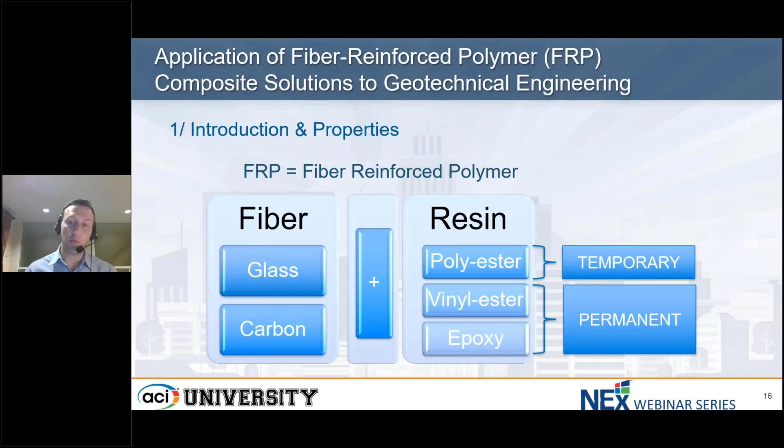So similar to what is done for rebar, polyester is exclusively used in temporary applications, and for most codes the temporary definition is less than 2 years, while vinyl ester and epoxy are resins that are suitable for permanent applications. And we will see how this can be used as well in geotechnical engineering.

A few properties about the material. One that has been largely used in geotechnical engineering is cuttability, the characteristic of the material being easy to break down and destroy. It might sound surprising when you think about construction, but this material has been used a lot for that, starting with soft eye applications in TBM tunneling.

So this is where we had the crossroad with concrete reinforcement, because it's used in diaphragm walls, and at the same time it's used for tunneling purposes. This is a typical property that has been used a lot, and you will see how we can use that in today's presentation.

As we know, those materials are extremely light, a quarter of the weight of steel for GFRP, and even a fifth for carbon fiber reinforced polymer. It's of course very much used when installation has to be done in complex areas, especially in slopes where cranes are difficult to access, or even underground where you are working at a face that can be several kilometers away from the entrance of the tunnel.

Again, the material is greater than steel in tensile properties. We'll see that. It's also corrosion resistant. We'll also tackle that aspect. And there are some other characteristics that could be interesting in niche applications, such as the fact that it's electrically non-conductive, thermally non-conductive, and also transparent to magnetic fields.

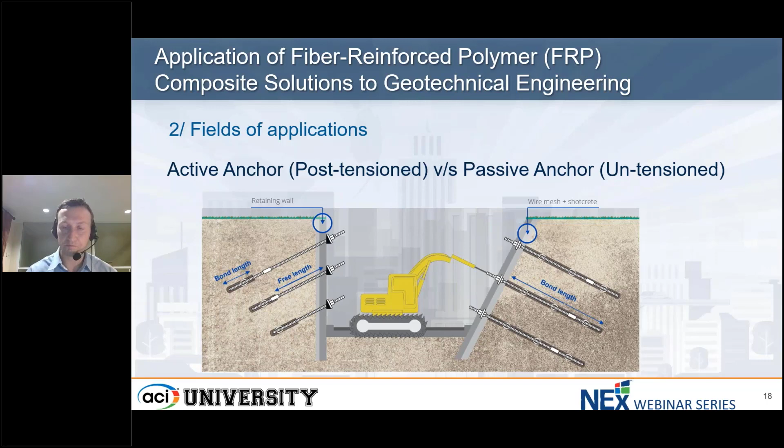So looking at the fields of application, what I propose today is to explore several properties of the product through the specific applications we are studying. After introducing the difference between passive and active anchors, another key aspect is the duration the product is used for. As mentioned in the first slide with the resin, we also differentiate in geotechnical applications between a temporary anchor and a permanent anchor. Whether you look at European codes or recommendations in North America like PTI, the threshold is 2 years. A temporary anchor will be less than 2 years, a permanent anchor more than 2 years.

And so we're going to explore several examples of products and the associated properties. One thing common to all these products, soil or rock anchors, rock bolts, active anchors, or tiebacks: all these are grouted anchors, and therefore the tensile properties remain the main dimensioning aspect, and bonding, not with concrete but in this case with grout, is key. So we're going to study that first.

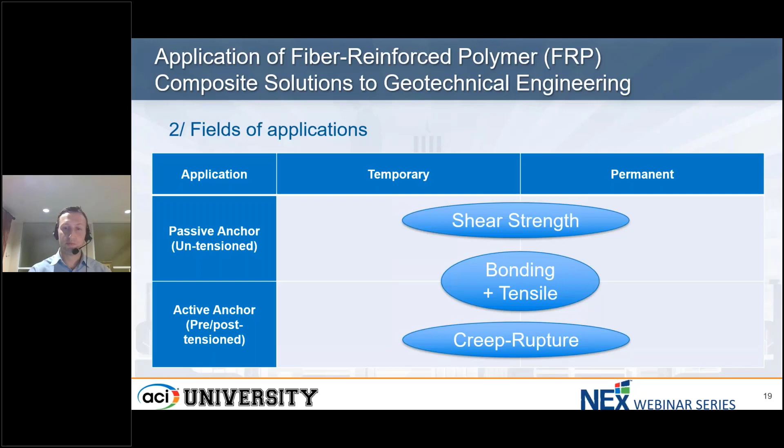After that, we're going to see parameters that are key in different applications. For passive anchors, we're going to study shear strength, which is generally a key concern of designers. We're also going to review creep rupture, which can be a concern for active anchors, and see how we address that when designing such structures. And for permanent anchors, we're going to review long-term durability and alkali resistance to ensure the product is suitable for long-term application.

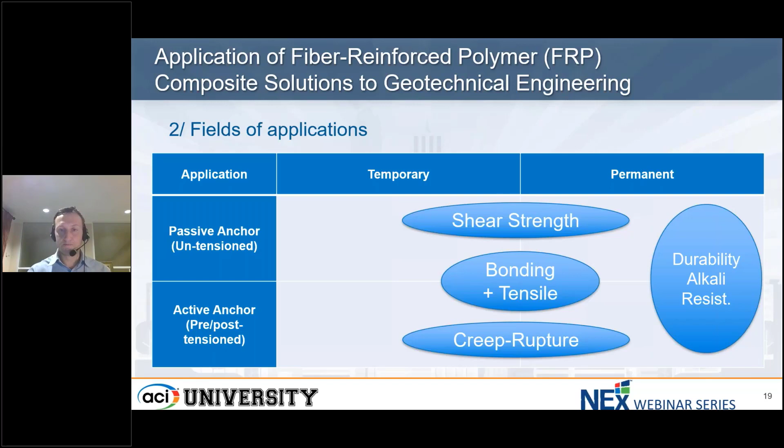Again, before diving into the actual examples, I wanted to highlight that in many cases, geotechnical guidelines are strictly addressing steel anchors, steel products. There are very few exceptions to that. So in the vast majority of projects we design with non-metallic anchors, we are using the design philosophy of those geotechnical guides, but we do have to refer very regularly to specification codes that have been purposely made for FRP.

And in that context, ACI, since the first version of ACI 440.1, and of course the associated ASTM standards are widely used. So we are very often using key design parameters or parts of ACI specifications and applying them into geotechnical guides when it comes to design. Similarly to rebar, where we want consistency between material specification and design code, we are really trying to keep this consistency between ASTM D7957, ACI 440.1, or more recently 440.11, to ensure our designs address the specificities of FRP material.

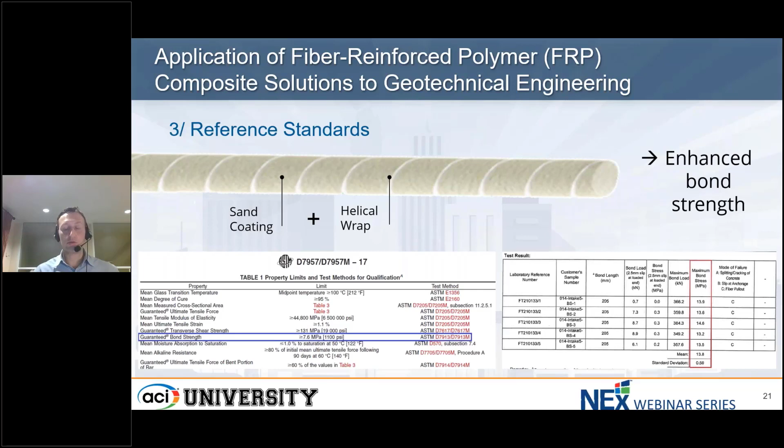So here you have an example of actual results obtained with this kind of bars. I repeat, such bond properties will be essential to a good product. Of course, when it comes to tensile, similarly to what is done in rebar, I would say the industry has quite well addressed and educated the market on the properties.

But maybe for some of you who might not be so familiar, the specificity of FRP bars is we always need to test them in full section of bars. We cannot characterize a coupon sample of the material because the properties are not linear with the section. There's a phenomenon called shear lag, which means the properties will not remain the same as the diameter increases.

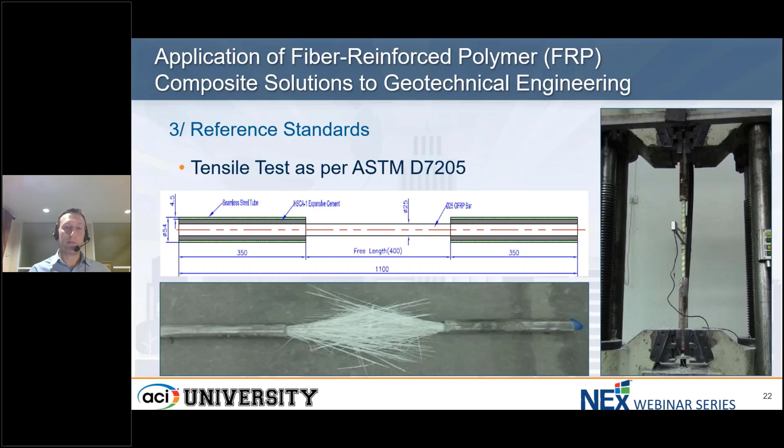So no yield point, no ductility, and therefore, while the modulus of elasticity is 4 times lower than steel, the elongation at ultimate is much lower. So this is something we always have to remind, because the failure mode and the mechanism engaged in geotechnical applications are different, and that's why we have to address them through specific design aspects. The same way ACI 440 uses equations different from ACI 318 for the very same reasons. So this is a reminder, but extremely important. Those are all the prerequisites before we engage in any geotechnical engineering aspect.

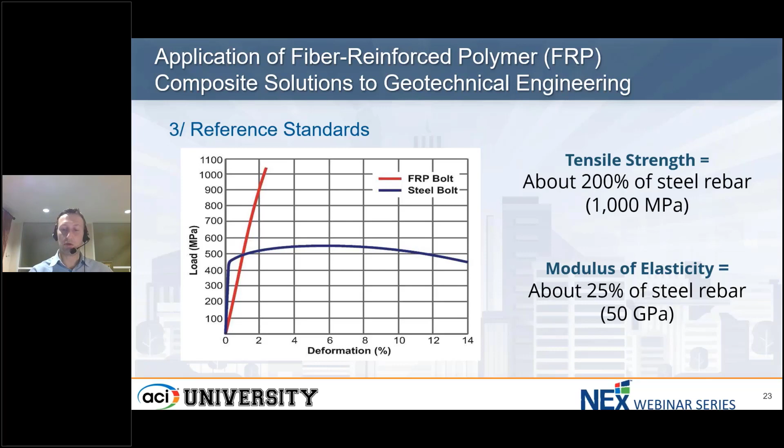So we'll start now with a first area of study. We'll start with those passive anchors, and especially I would like to address the case of soil nails that are mostly used in slope stabilization. And for a long time, we've seen people concerned about designing those products with GFRP material on the basis that the shear of the bar was low. And that's partly due to education that we've been doing explaining that the material is easy to cut. So this is something really not easy to explain, because people feel we are turning around the properties of GFRP the way we want.

In reality, when you install the system in the ground, so that can be in rock, that can be in soil, before the system fails in shear, there will be crushing of the surrounding material. That could be grout, that could be the ground itself, so soil and rock. All this material will be compressed, and once its compressive strength is exceeded, will be crushed up to a stage where the actual bar will fail in shear.

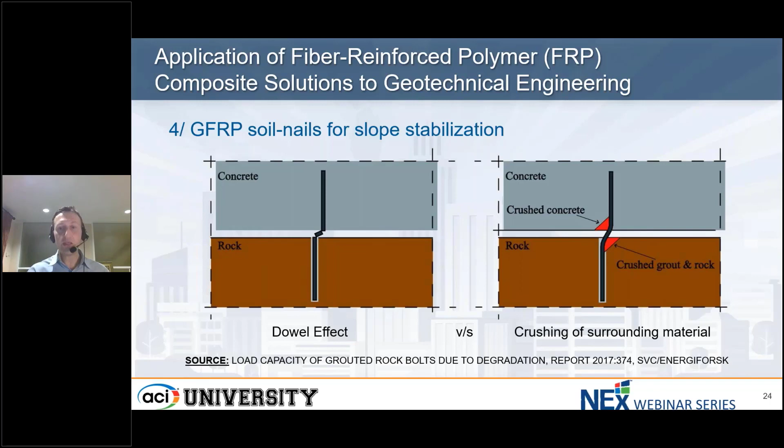So here, what you see on the screen now is a comparative test. On the left, you have a GFRP bar, which is a fully threaded bar actually, used often as a rock bolt. Of course, on the right side, you'll be familiar with a steel rebar, but I think I can assume many of you have not necessarily seen the test you see on the right.

Actually, we've used the ASTM standard that is normally for GFRP bar, and we apply that to a steel bar. Why is that? Actually, most of the time, we don't need to test shear of steel bar. We just know that. We use von Mises ratio, and then we derive it from its tensile properties. However, we felt it was necessary to compare apple to apple, to perform the same test on the same product.

So you will see that when you test FRP bar compared to steel in this condition, we get fundamentally different results because there's no surrounding material. Again, this is the pure dowel effect.

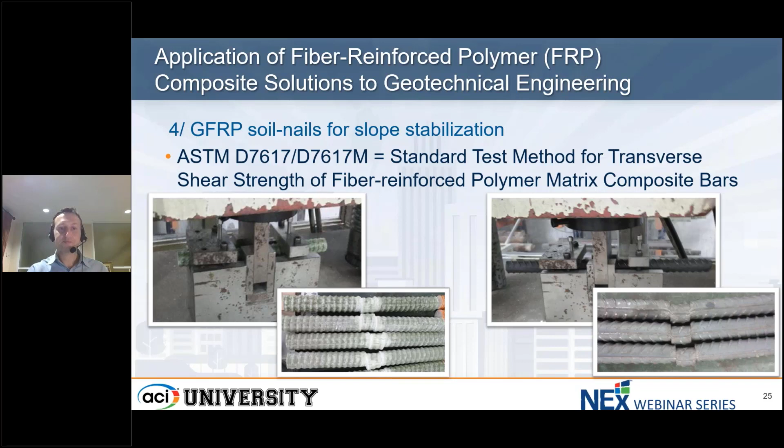However, there's a very interesting BS standard, 7861, as you can see here on screen, that is originally meant for coal mines. So this is a pure geotechnical engineering design guide. And what's very interesting, they do address the specificities of both steel and FRP. So that's one of the few exceptions I was mentioning earlier, because geotechnical engineering generally only considers steel.

This is the test of a simulated borehole. So the sample is tested with its surrounding material. So it can be cement grout, it can be resin grout, but we don't test the bar alone. We do test with surrounding material. And we've run the same test, again, with a GFRP bar and of course with the steel bar as well as a reference point.

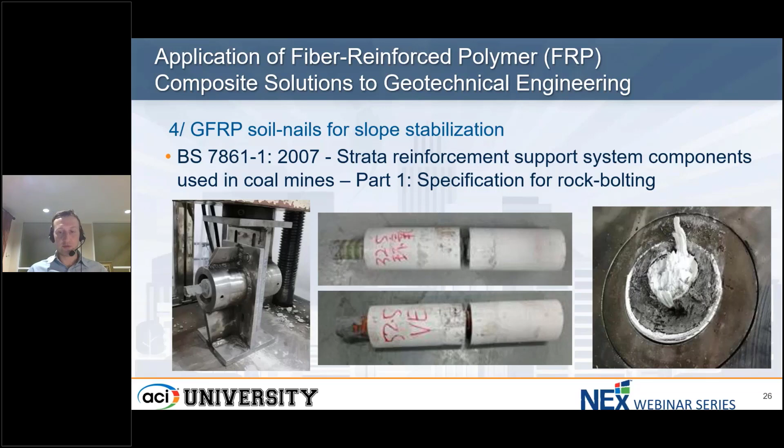So let me present it in this way. What's very interesting with the results is on the second column in the middle, bar alone, you can see that a GFRP bar would only develop about a third of the steel bar when tested for pure shear, so the dowel effect, which is consistent with the perception that GFRP is weak in shear, and also it's easy to be consumed by excavation equipment, tunnel boring machine.

However, when you test it as a system with the surrounding material, the performance of steel increases marginally. You see from 416 MPa to 488 MPa, but the performance of the GFRP bar more than doubles. And for this reason, the GFRP bar would develop 75% of what you get from a steel bar. So what this table is telling us is a non-metallic system behaving in shear can develop actually way more than we suspected, actually a lot, 75% of what the steel system performs.

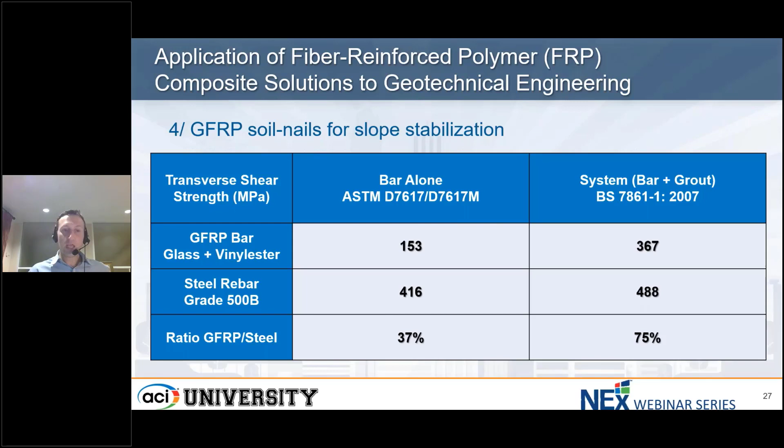And even more interestingly, the value of 350 MPa is actually what you get from von Mises ratio. So actually, in this case, the GFRP bar develops more than what you would assume for a steel system. So it would actually offer you all the safety you would expect in your design. To explain a bit about that, I invite you to study a very interesting paper from Dr. Thomas, who published it at the World Tunneling Conference.

I won't have the time to explain all in detail here, but the idea is the reason GFRP can have such behavior is because of the tensile properties. So when you get this deformation, some of the stress will be taken in the tensile properties, and some will be in the frictional. And so GFRP being so strong in tensile, you really get this contribution when you have the system working in shear, and that gives you, with the model developed by Dr. Thomas, 350 MPa at 90 degrees, which is what we observed.

What's interesting is if you were to do that at a different angle, like often we see in geotechnical work, actually GFRP would exceed the performance of steel, and that allows us even to get better behavior.

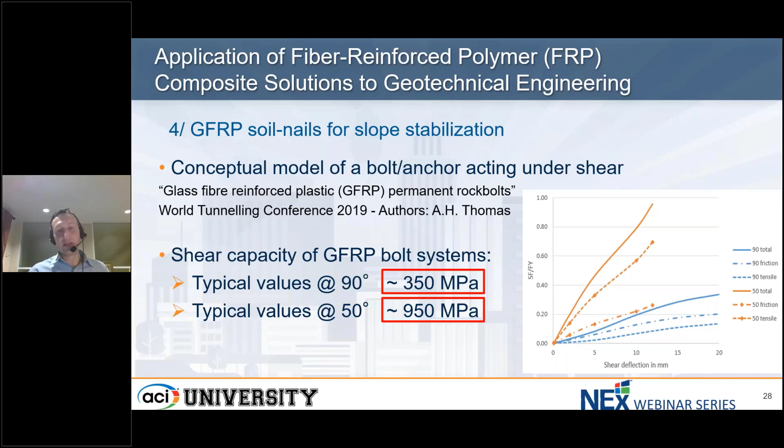So with all these results in hand, we were able to offer very interesting ground engineering applications, starting with soil. So what you see now on screen is an example of non-metallic or partially non-metallic soil nail. So it's a hybrid system. The reason this is a hybrid system is we did retain a splicing system made of steel and even the head made of steel due to mechanical continuity.

So the concern with the soil nail is generally we are way over 12 meters or 40 feet, which are generally typical lengths for shipping, especially for containerized goods. And in order to have mechanical continuity, you need to splice that. Unlike in a concrete structure, we cannot use lap splice because we cannot rely on the integrity of the concrete. Here we have grout that will very often be damaged, cracked through the normal movement of the soil or the ground.

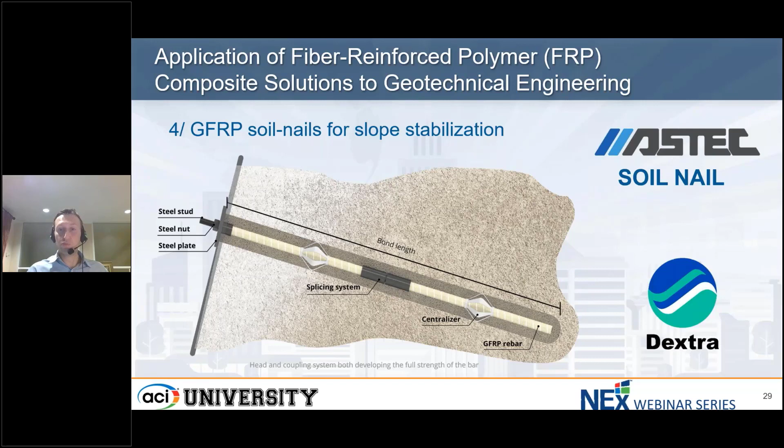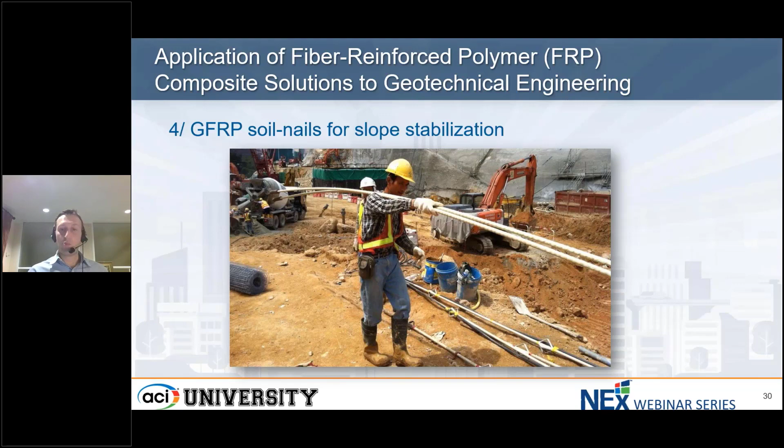As we know, those systems are extremely light. I mentioned that in the introduction, a quarter of the weight of steel means you can easily carry those nails by one man. You see he can even carry two nails like here in this example. And to work on complex terrain like slopes, it makes it much easier.

So as I highlighted, the mechanical continuity is key. And again, here I wanted to highlight with a practical example of pull-out tests, which are very common on a job. So you would normally test 5 sets, for example, at the beginning of the job, and then there will be an agreement with the consultant and the owner on the frequency of tests. So typical frequency would be 2% of the nails installed will be tested for pull-out. And that's why you need a head that allows you to perform that in situ test.

So we are using such a system, steel connectors, to extend the bar, to also test in the head location, and that really gives you the best of the two worlds, with FRP material that is again resistant to corrosion, that is easy to consume, easy to cut, with the steel system that can develop high strengths in a nut, in a stud, in a fine pitch thread.

Maybe the challenge, however, when you have steel components is cuttability. So those components are small enough to be still consumed by the excavation equipment. So most of the time, statistically, you're going to hit the GFRP bar. But if you were to hit the steel components, it would be very easy to evacuate it like you have a boulder, an inclusion in the ground.

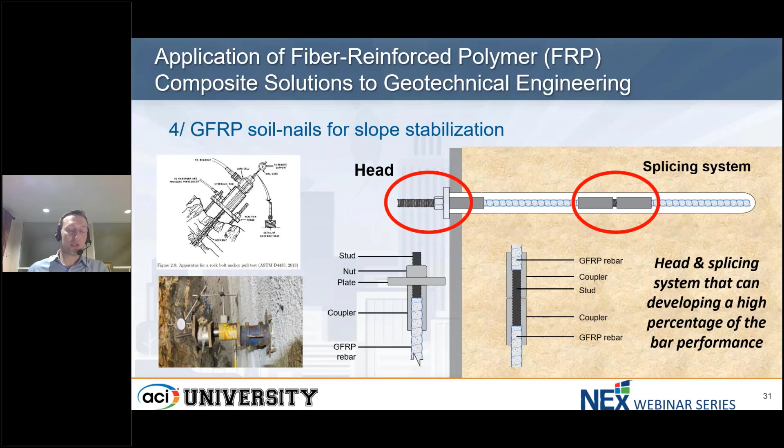And for corrosion, how do we address that? We address that the same way we would address corrosion protection of couplers when you have a steel anchor, like a DCP anchor, for example, a corrosion protected anchor. We're using heat shrink sleeves that are also used, for example, on steel couplers, steel splicing systems for steel rebar, epoxy coated, for example. So the heat shrink sleeve is the best way to protect from corrosion those localized steel components you get in the system.

So through all this, we have enough technical background on the tensile, bond, and even shear properties. Also enough answers from the system through the steel splicing system and corrosion protection to design a GFRP soil nail.

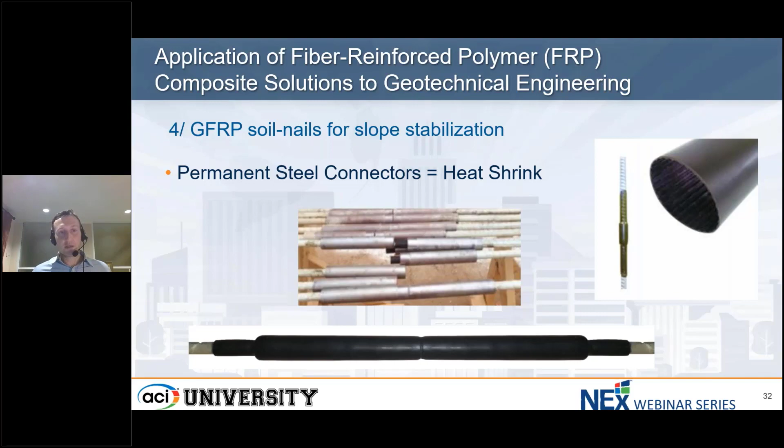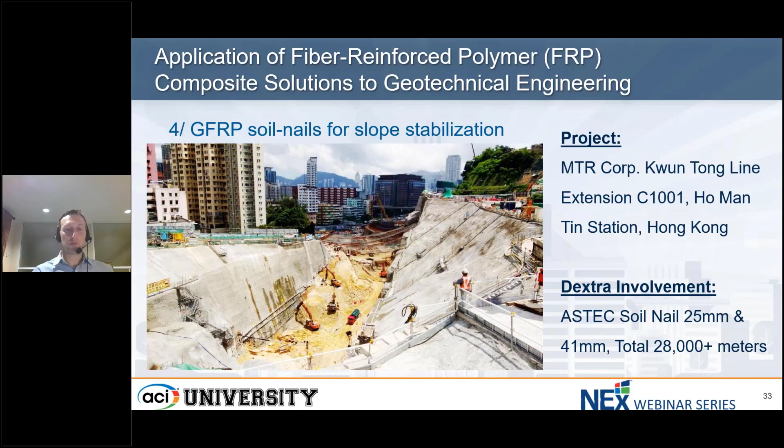So this is a typical example of a soil nail project, but maybe for the records, as I mentioned, this is over 10 years now. And actually every year Dextra is probably supplying 3 or 4 jobs specifically with this kind of application. So non-metallic soil nails, temporary, and more recently, we are now doing pilot jobs with the Hong Kong Polytechnic University, the local government, to characterize using those soil nails in permanent applications on slope stabilization, which is a very big concern in Hong Kong with a heavy rain season. And so it's very important to stabilize those slopes in Hong Kong. So they are now exploring, through 2 pilot projects, using soil nails permanently.

Allow me now to move up with new technical concepts so we can address, let's say, somewhat more challenging applications. After doing those passive soil nails, let's move up to doing tiebacks, so active anchors. And to move from a soil nail to a tieback, as I explained, we are dealing with a post-tensioned system, and it's extremely important to characterize the creep and especially the creep rupture of the material. So again, not reinventing the wheel. Answers, as often, are available to us in ACI and ASTM.

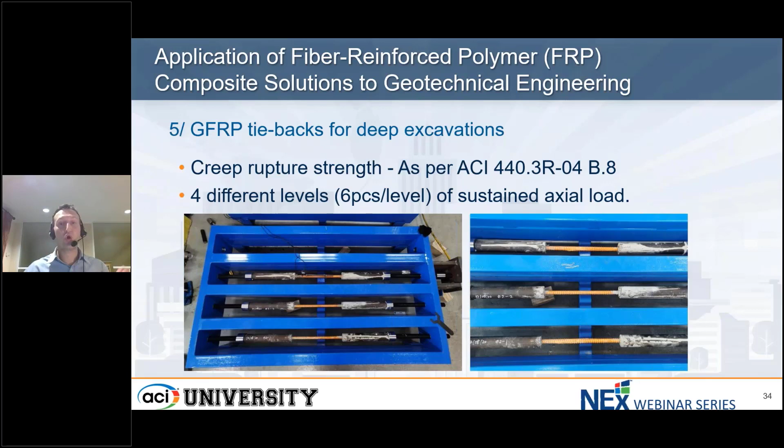So we are following the creep rupture test from ACI 440.3 to obtain the million hour retention. For those of you not familiar, we apply many different levels of stress, purposely very high, to induce rupture and to measure the time, to know when the rupture will occur. What is interesting is those ruptures occur in a logarithmic fashion. So in this graph you see at the bottom, the scale is the time, but in a logarithmic scale. Typically number 3 means 1,000 hours, number 4 means 10,000 hours, and so on, up to 10 to the power of 6, which is a million hours.

And why do designers love million hour retention? That gives you 114 years of design. So as we can see, the numbers are highly correlated. We see the R2 factor is almost 0.98. So it shows that there is correlation between the stress level and the time, and therefore we could conclude on the million hour retention of that particular GFRP material. This gives us a key factor to design

those anchors, but again, in the same spirit of ACI, I'm thinking, for example, of ACI 440.4 that is used for pre-stressed concrete members, we are not using GFRP for permanent applications, so we will only address temporary applications. Otherwise, creep could become prohibitive for GFRP, for glass fiber reinforced polymer anchors.

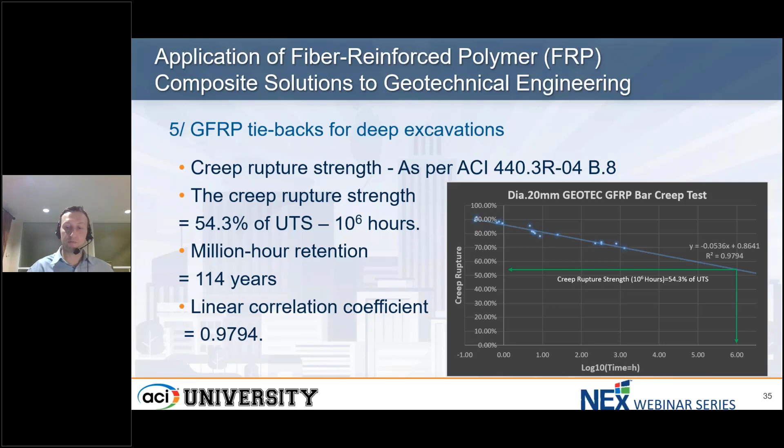So now, how to achieve that? Now that we've seen the theory with the creep rupture, how to design and obtain tiebacks, so post-tension anchors? Dextra's answer to that is a product that behaves in a very similar fashion to those steel strand or multi-strand anchors. So the idea was to develop again a hybrid system using a GFRP bar on one side and a steel strand on the other side, with the same splicing system introduced earlier, so a steel connector. And the idea is to have the same capacity per strand.

So when you have a 0.6 inch steel strand, or T15 in metric, we get the same capacity, which is 250 kilonewton. And even in terms of design, we get very similar design values for temporary application, which is 150 kilonewton per strand. So the beauty of this product is the ability to design the product the same way. So we end up having the same number of tendons, and it can be installed and tensioned the same way because the product is using a steel strand for tensioning purposes at the head location.

So multi-strand anchors are very easy because you can design for a large range of capacity, loads, just by adding more tendons. This system can be spliced, so you can address many different lengths. And as often, the free length is obtained by placing a bond breaker. So we debond the free length, and therefore we can have a fully grouted system just by protecting the GFRP bar from the outside. The bar is free to move inside the free length through this bond breaker, and therefore it's very easy to create those multi-strand active anchors.

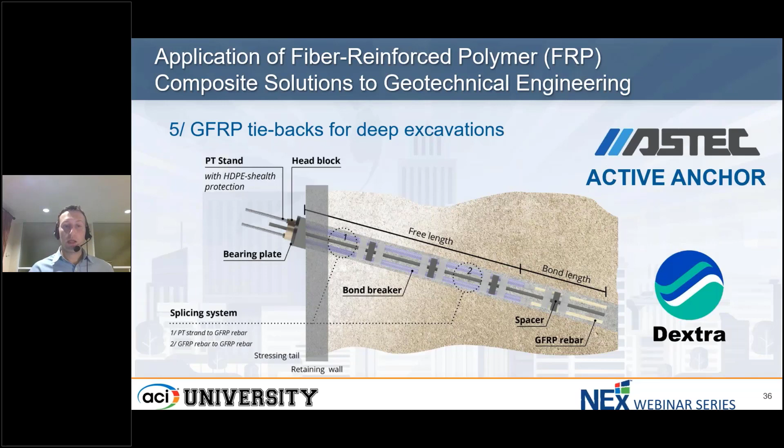So as I highlighted, now you can see the product, let's say, without the bond breaker, which is a little bit easier to understand. But the beauty again of the system, again hybrid, everything you see in GFRP will be installed in the ground, and the steel strand, the upper side on the left side of the screen, will be the part you have inside the retaining structure, protruding outside to install the hydraulic jack and be able to perform testing.

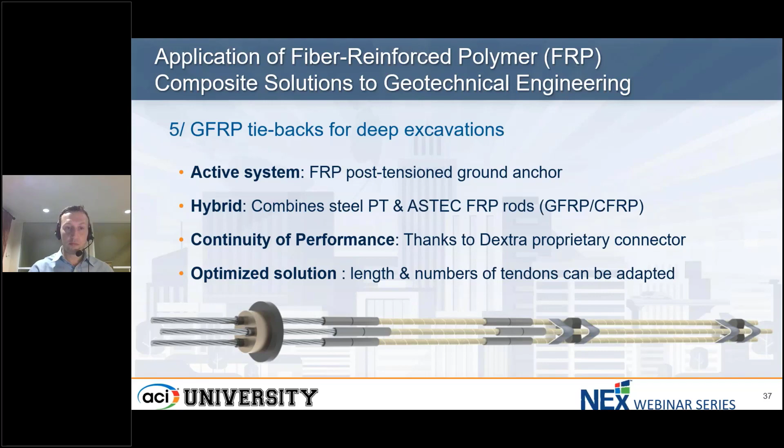So the idea of a product like this is to be used, I would say, either inside excavations of typical underground car parks as an alternative to strutting, internal bracing. So the idea is, yes, I want to be able to install an anchor, and at the same time, I don't want to create issues for the neighboring plots, because you will encroach into adjacent plots. So instead of installing steel and trying to remove it, we're installing GFRP and know that this GFRP is not creating obstruction.

Another application, which is a bit niche, but it's also interesting, is the ability to place this anchor in a location where we know it's going to be destroyed, and typically that's the application of soft eyes. So I'm going to show you a very short video just to illustrate how anchors have been used in the soft eye location. So it means in the alignment of the TBM, and this helps somehow as a mock-up to prove how cuttable the anchor could be. And further to that, it was able to be used in other locations, so pretty much the whole perimeter of the station. So I'll present the video, and I'll tell you a little bit more right after.

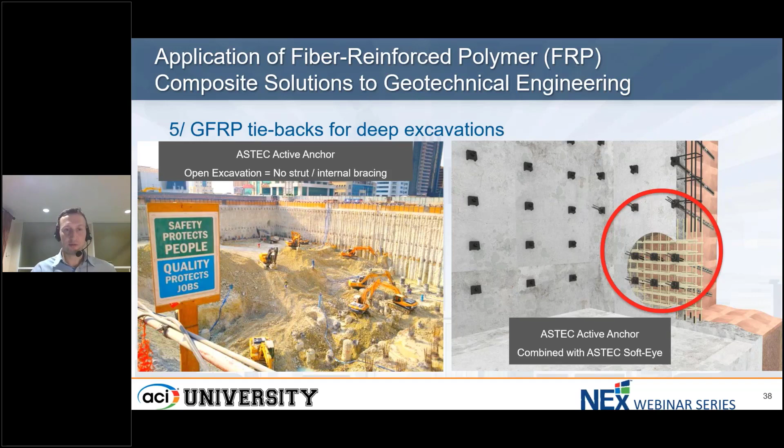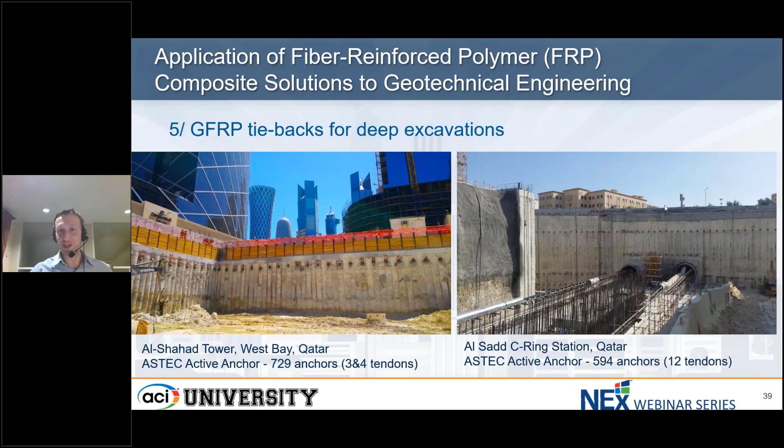So the project I'm going to show you is a project in Doha, in Qatar, and those anchors have been used in many metro stations. So here you have just examples of excavations that were done there, and you see the numbers. So on one job site you could see several hundred anchors. Most of them were relatively low capacity, 3 or 4 tendons, but we've done anchors with 12 tendons. There were 7 layers of anchors in that station, which was a crossing of two metro lines, so 35 meters deep, about 100 feet. And so that makes it extremely challenging. So quite an interesting project. So let me show you now the video, and then I'll illustrate it a little bit after.

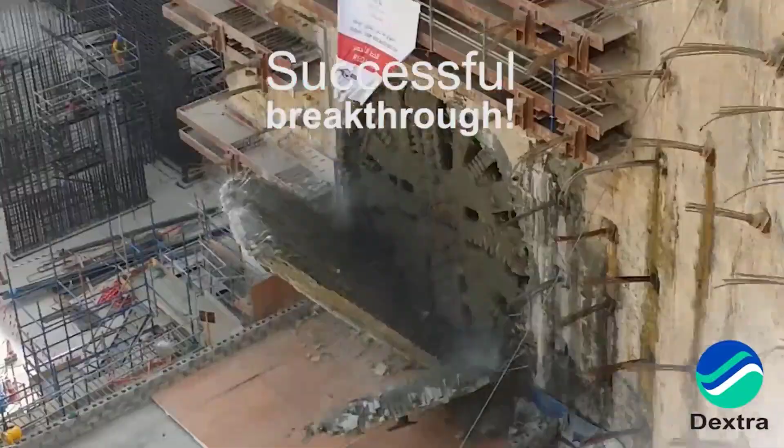So as I highlighted, this video shows to an untrained eye, let's say, a typical soft eye breakthrough. So the tunnel boring machine has been able to bore through the diaphragm wall. But what was really interesting is those anchors installed inside the soft eye area were non-metallic. Actually, maybe you saw this, it was mentioned, it was even glass fiber, it was GFRP used in that project.

And so that really proved that it's possible to design anchors going beyond the original footprint of the excavation, and yet making them of a material that would be easily consumed. So here by TBM, but you can imagine the same thing from the surface, could be a piling rig, or also from an excavator in case of open cut excavation, for example.

So after reviewing those active anchors and post-tensioning, this presentation wouldn't be complete without addressing permanent applications. So we've seen those passive soil nails, we've seen those active tiebacks, yet we are doing more and more geotechnical applications with permanent solutions. So remember, over 2 years, but actually I'm really referring here not just to 3, 5, 10 years or semi-temporary or semi-permanent, as some might say. No, we are designing projects with 50, 100 or 120 years application.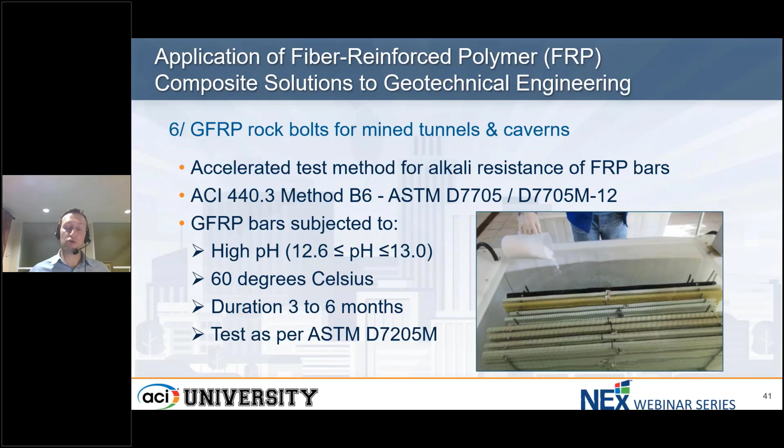So we've done a lot of characterization of the material. Again, for those of you not familiar, this accelerated aging test is pretty straightforward. The idea is to conduct tensile tests as per D7205, as I showed earlier, but after conditioning the bar. So you get some test bars at T0, at 0 hours, but then you also want to have bars in an environment that is high temperature, so 60 degrees, very high pH, and that will give you a simulation of the long-term behavior of the material.

So here, for example, there are so many different tests performed with large variation in the duration. Also, whether you use moist concrete or you use an alkali water solution. Also, if you apply stress at the same time or not. But in general, again, best is to refer to ACI for the guidance. The requirement in ASTM D7957 is to be over 80% after 90 days. And so this is again showing that the behavior of the material is highly predictable.

And so we can just apply a factor. So again, in ACI 440.11, the factor today is 0.85. So we discount the tensile performance by 15%, and then we get the performance of the material over time. And that's really useful, using this for designing GFRP bolts, for example, because the alternative to that would be a steel bolt on which you have to put many corrosion mitigations, so typically galvanization and/or epoxy coating and/or a corrugated pipe, all this to delay the corrosion, but always with a risk this corrosion happens.

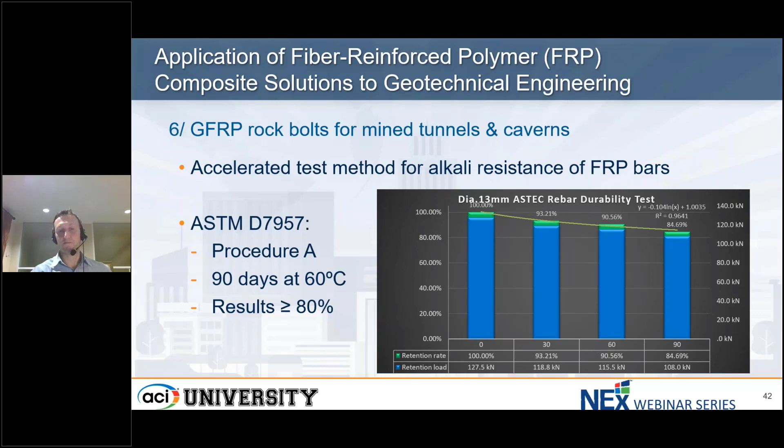So how to do those applications? We have available to the people designing tunnels and caverns a large variety of rock bolts. Typically, there are even some self-drilling rock bolts available, but I'm going to address here maybe some of the most common types, which are solid and hollow rock bolts. It is good to have both options available for different types of installations. So typically, hollow bolts are used more to inject the grout once the bolt is installed. Solid bolts are generally installed either in a pre-grouted hole or with resin cartridges, typically in mines.

And as you can see, we are using a fully threaded bar, which makes it very easy to add accessories. So here you see we have a non-metallic system. Most of the rock bolts, or almost the entirety of rock bolts, are less than 12 meters, so we don't really have the concern of splicing.

However, we still developed special accessories to be able to perform the pull-out test by mobilizing around 150 to 180 millimeters in the head location and be able to develop a large performance in the head location, again, for pull-out testing, as I highlighted earlier. So again, unlike a soil nail, here we are able to use a shorter system, and therefore we can rely on being 100% non-metallic. And there are many different accessories available in the head location.

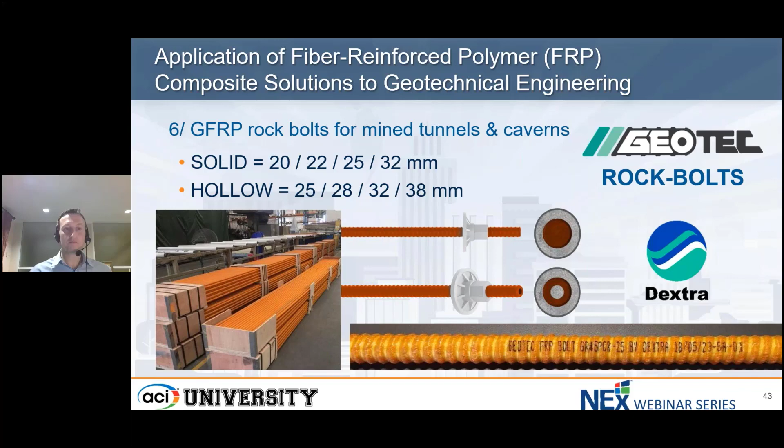One of the key advantages, again, working underground, especially when you work on a platform, when you work on a bench, is the material being light. It was proven, and this is a very interesting study from Scandinavia, that installing those FRP non-metallic rock bolts is so much easier. Maybe to give you one rule of thumb, GFRP being stronger and at the same time lighter, we can normally cut the weight of the bolt by a factor of 5 to 6.

A typical diameter 32 rock bolt could be 40, 50 kg when it comes to long lengths, 6, 8 meters; you get it below 10 kg most of the time when it's GFRP, through reduction of the diameter and through lower density. So definitely a very big advantage here when it comes to installation. It reduces the risk of incidents or accidents, and of course increases productivity.

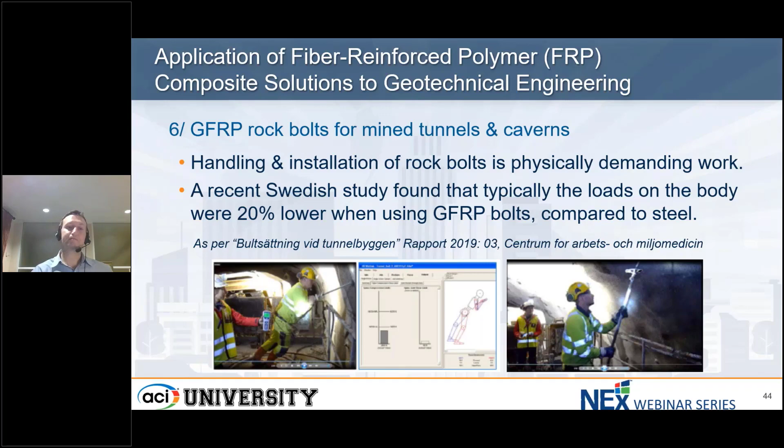So let me illustrate this with a very interesting project. I'm going to use for this presentation a project that is completed and already operating in Vietnam, storing LPG for an industrial application. The storage of propane and butane is actually under the factory that is producing synthetic textile, PP fiber, polypropylene fiber.

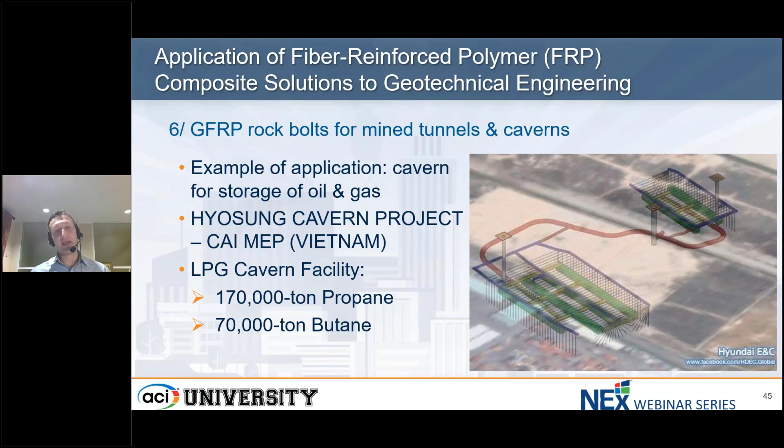And the concept is to create a large cavern to store that. This cavern is saturated with water to ensure the gas is trapped and doesn't leak through all the veins, all the joints. And so that makes it very interesting. So let me illustrate. This is an example of an access tunnel, and all the white spots you see here on the lining are actually GFRP rock bolts.

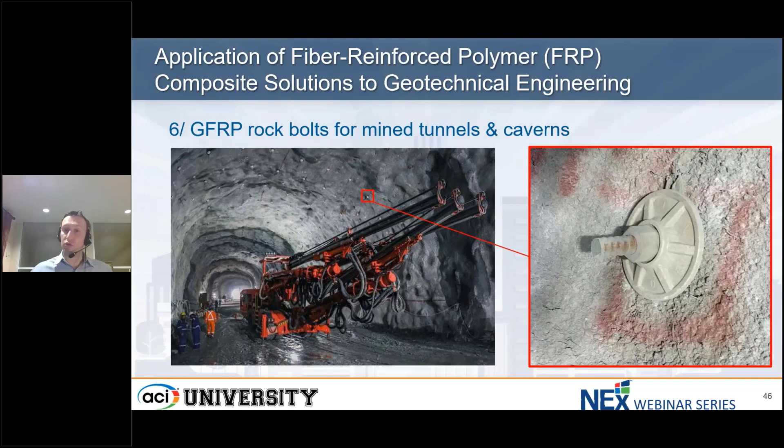You can see that it's an unlined tunnel. The same way, the cavern is also an unlined cavern. And those bolts are permanent. The lining you see here is a very thin layer of shotcrete that is only there to keep in place very small pieces of rock that could fall. But all the pinning of the wedges in this underground structure is done by using GFRP rock bolts that are designed to last 50 or 100 years, depending on the application.

So you can see how light and also flexible the rock bolt can be, which makes it very easy to install. This is the typical geometry of the actual cavern, so you see quite large, 22 meters high, 17 meters wide. They have two benches to produce that structure. On a job like this one, over 30,000 rock bolts have been used.

But to give you some idea, we've also supplied some much larger caverns that used in excess of 600,000 rock bolts. Every single rock bolt is GFRP because it has to be resistant to corrosion and designed to last. And currently we are even executing a tunnel project, and rock bolts are also used in similar fashion as permanent rock bolts in this single shell lining tunnel.

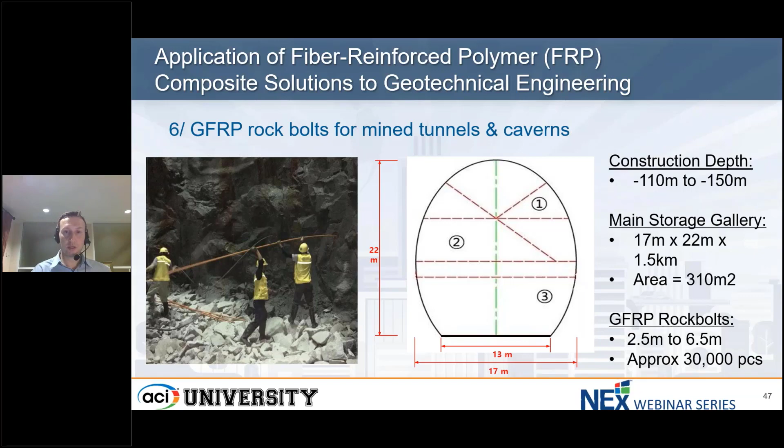So to conclude on this presentation, the objective today was to share with you some key parameters. I hope this is clear for you. So we've been through the tensile and the bonding. We've been through shear performance. We've been through creep resistance. And of course, we've also been through alkali performance to address permanent applications.

Just as a summary, I won't go through the whole slide, but I wanted to illustrate here examples of applications: a passive or an active anchor, a temporary or permanent anchor. And just to finish on that, I highlighted that we normally use GFRP only for temporary active anchors because we have the combination of alkali requirement and creep behavior. So that's why the most challenging application in geotechnical engineering would be an active permanent anchor.

And today, our answer to the industry, and I know this is a consensus with other designers, manufacturers, suppliers, is to use carbon fiber, CFRP, when designing permanent active anchors, because the requirements in terms of corrosion and alkali resistance, combined with creep resistance, make it challenging. And to be on the safe side as far as the application is addressed, we're using carbon fiber for such applications.

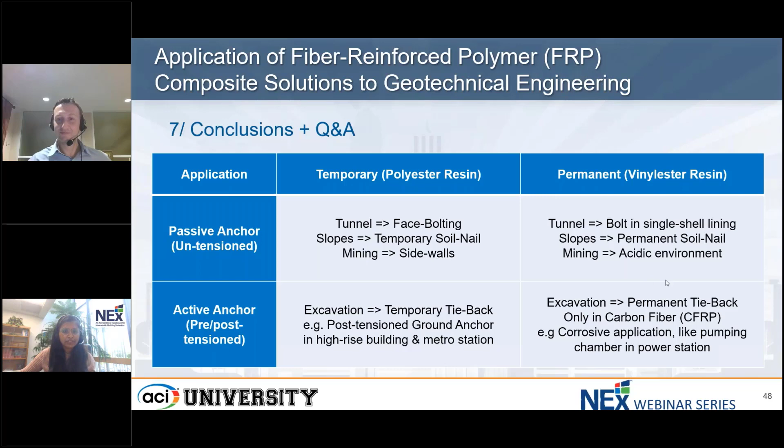Yeah, Pierre, thank you so much for your outstanding presentation and for graciously sharing your extensive knowledge and diverse applications and perspectives. And I would also like to mention to the attendees that our speaker is presenting from Thailand. So again, thank you for accommodating this because it's an 11 hours difference. So thank you so much for that. It's my pleasure. Let's move to our question and answers.

So our first question is, what field quality control, tests, and inspections are required to ensure GFRP is installed correctly, or for full utilization of GFRP strength? Okay, thank you very much for the question. So the first answer, which I used as a red line throughout this presentation, is we always start by looking at what's available within ACI and ASTM.

So if you look at the specificity of our material, when we do typically a soil nail, the first thing would be, Mr. Contractor, recommendations of installation, also inspection. Let's refer to ACI 440.5, for example, that gives all the recommendations for placing, etc. Also, when it comes to testing of the material, we would also look at Table 2 of ASTM D7957. There are a certain number of tests that need to be performed on the actual batch that is delivered.